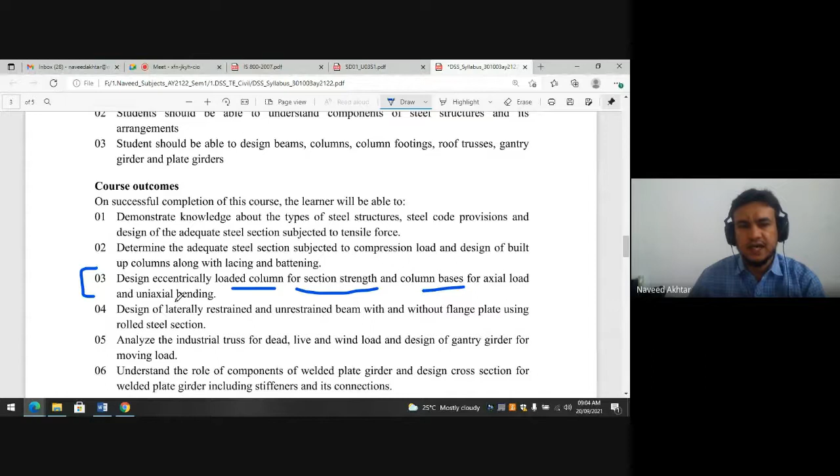So mostly in unit number 3, if you look at the syllabus, the course outcome number 3 is the design of eccentrically loaded column for section strength only, and column base for axial load and uniaxial bending. So this is the course outcome for unit 3. If you come to the content of unit 3, it is nothing but the eccentrically loaded column and column base.

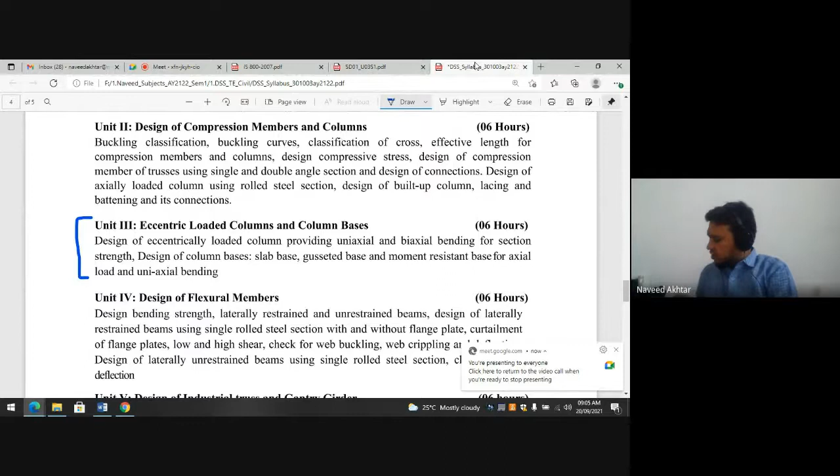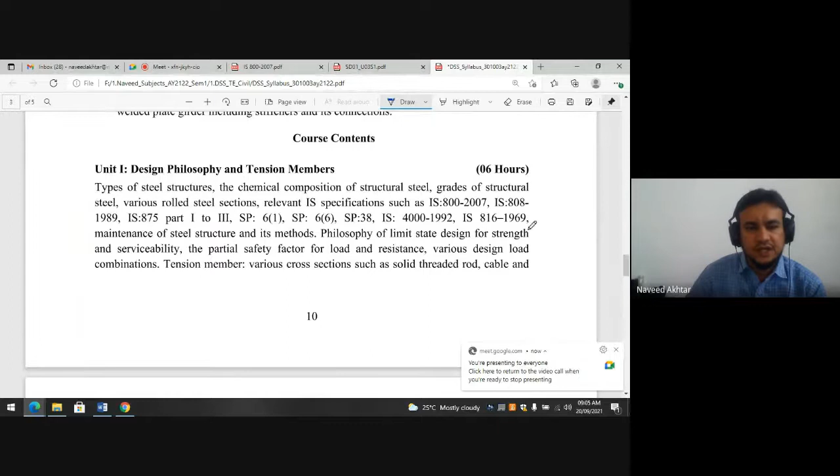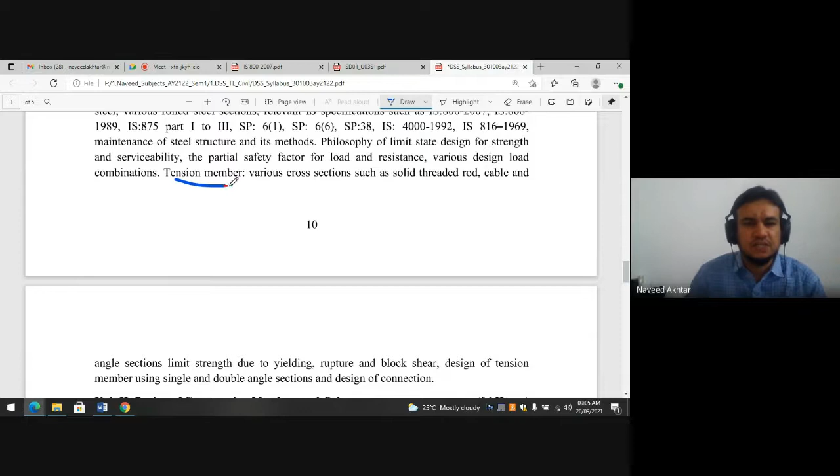Already in unit one we covered the basic parts of design of steel structures, types of steel structures, various codes and design philosophies, forces, factors for material and load, and tension member design. You have seen unit number one and completed it successfully. Additionally, we covered the connection design in unit one.

In unit two, we saw the buckling classification as per IS code: buckling curve, that is class 1 plastic, class 2 compact, class 3 semi-compact, and class 4 slender. Classification of cross section from table number 2, page 18 and 19. We found the effective length from table number 11 of IS 800:2007, and the design of compressive stress.

We covered design of compression member of truss, single angle, double angle, and did examples on that, and also the design of axially loaded column with built-up column sections using lacing system and batten plate system. Steps for that we have seen, and I gave the assignment for the design of batten plate system, and I have shared all design calculations with you on Google Classroom. You can take the notes I have given lecture-wise and complete your assignments, and whatever sheet for lab work I have given you, you should draw.

Now today we will start the design of eccentrically loaded column. We design eccentrically loaded columns providing uniaxial or biaxial bending for section strength only. Only we have to design for section strength here.

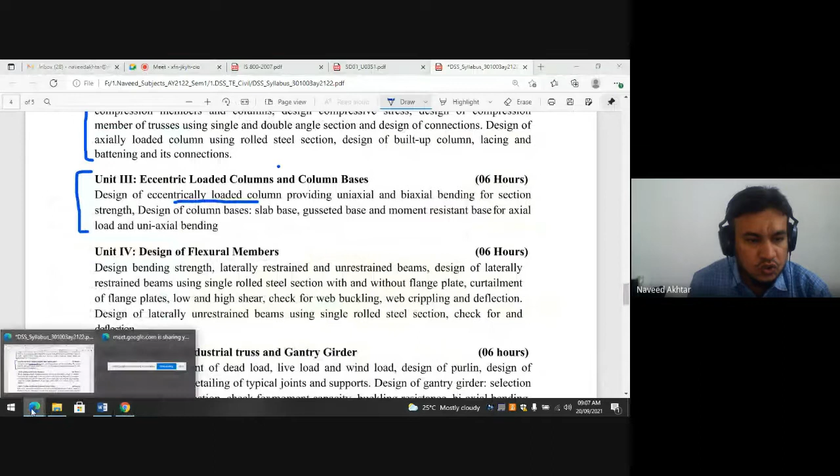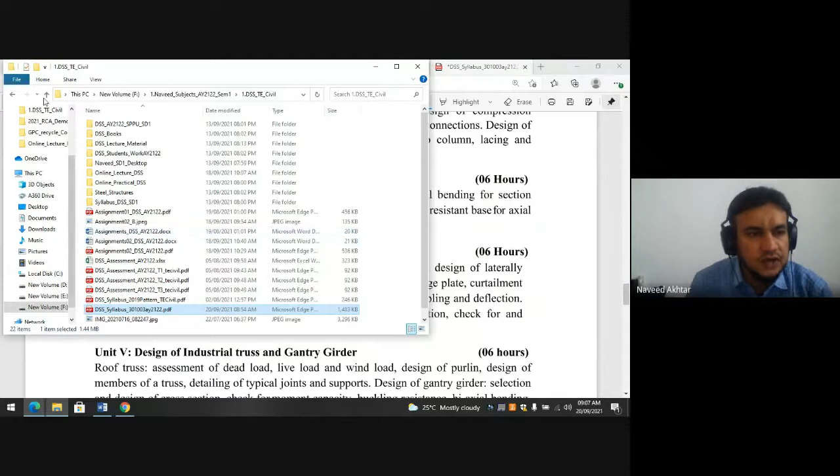You don't need to go for serviceability condition in that case. Only you have to design for the section strength.

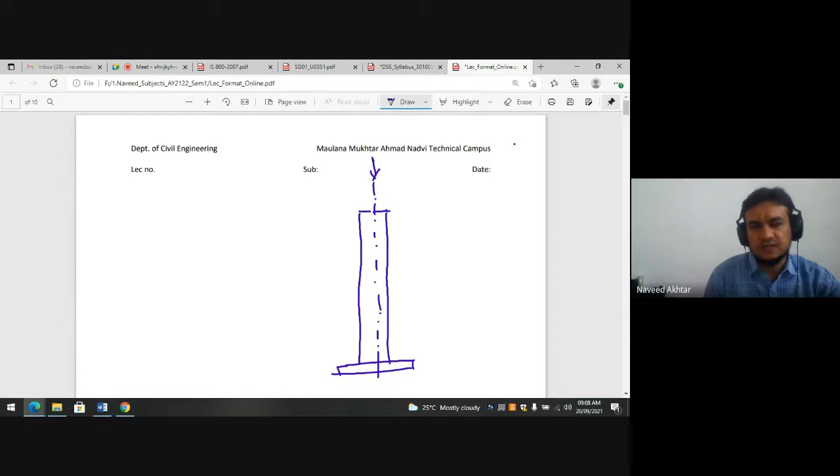So what does eccentrically loaded column mean? Previously we designed the column as the vertical member supporting beams and girders, resting on the pedestal or on the footing or foundation. This column has a line of axis, and the load coming over the line of axis is your factored load. This is called an axially loaded column, when the load is acting at the CG of the section.

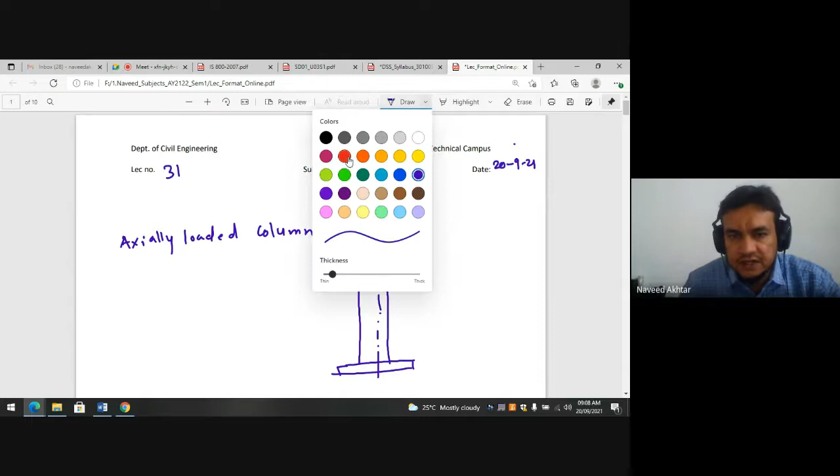If the load is coming other than at that axis, for example in case of a girder resting on a bracket: the bracket carries the load, which is transferred to the column. It is connected to the column with the help of an angle or channel, whatever it may be.

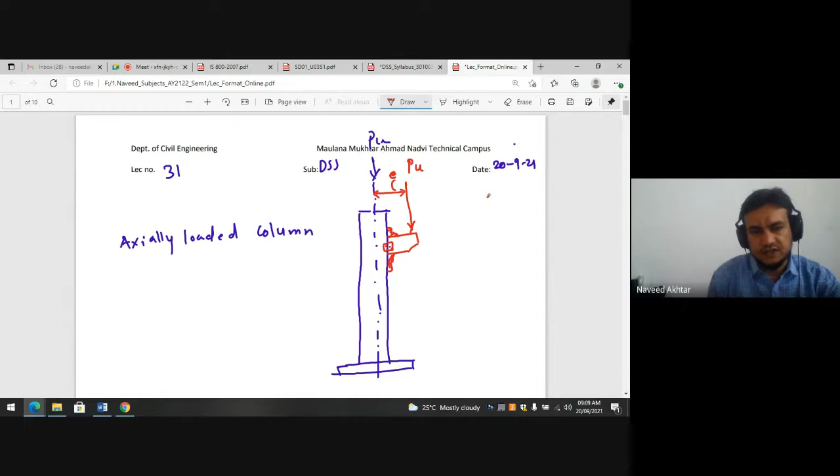If the load is coming here with some eccentricity, that eccentricity creates a moment on the column. So this column, if I mark it in red, is not an axially loaded column anymore — this is an eccentrically loaded column.

In real life, many such cases you will observe. In case of steel structures, most of the time your load is transferred through the bracket, so there is eccentricity on the column. How to design this eccentricity column, we will see the step by step process today. If the column is eccentrically loaded, then we have to design for axial load and moment also, because this eccentricity is causing a moment.

Moment equals P into E, where P is the load and E is the eccentricity, that is, the distance. So load into distance is nothing but moment, measured in kilonewton meter, and load in kilonewtons. If the column is designed for axial load, and due to eccentricity there is moment also, and if it is eccentricity on one side, then it is called uniaxial bending.

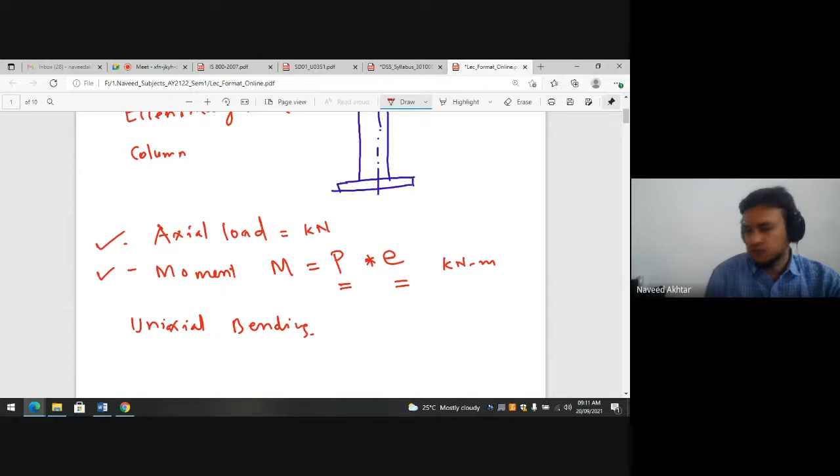Why is it called uniaxial bending? If you see in the plan of the column, this is the major axis, and this is the minor axis. If your load P is somewhere here, this is the eccentricity, and moment is equal to P into E. So at the major axis, if I call it Z axis, then Mz is equal to P into Ez.

But if your load, this is the column, and this is the major axis or minor axis, whatever you can say - this is the major axis, this is the minor axis. If your load P is acting somewhere here, then its eccentricity is Ez, and this eccentricity is Ey.

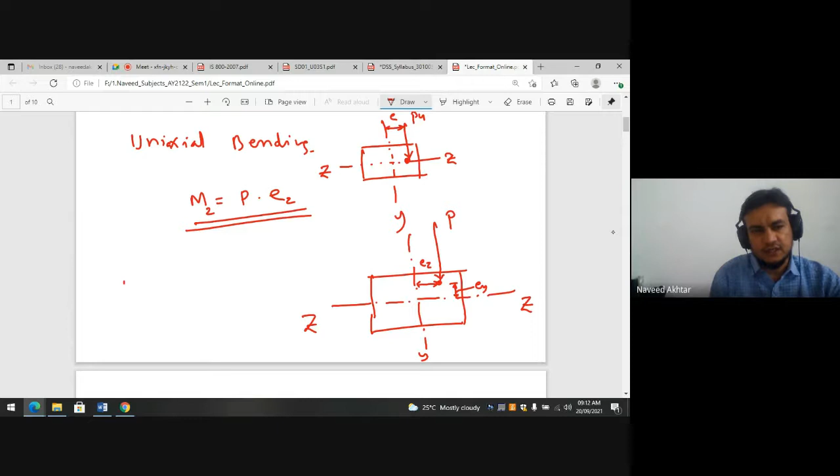If you measure this, then there is biaxial bending. So this is nothing but biaxial bending, and you have to consider both Y as well as Z directions to find out the moment.

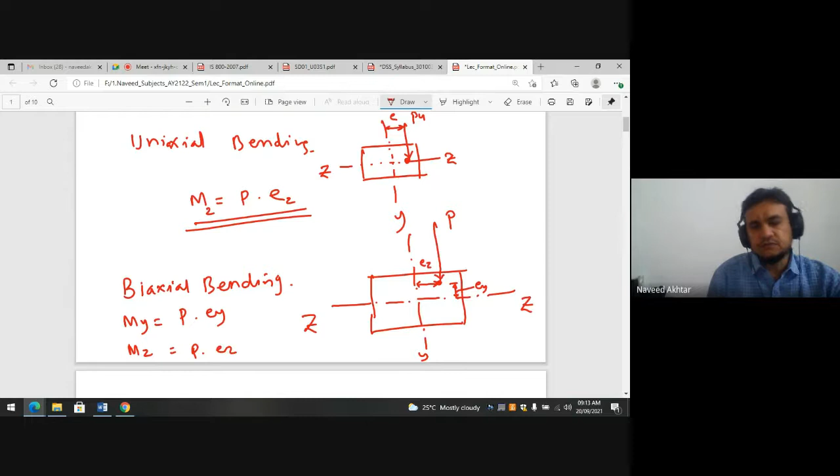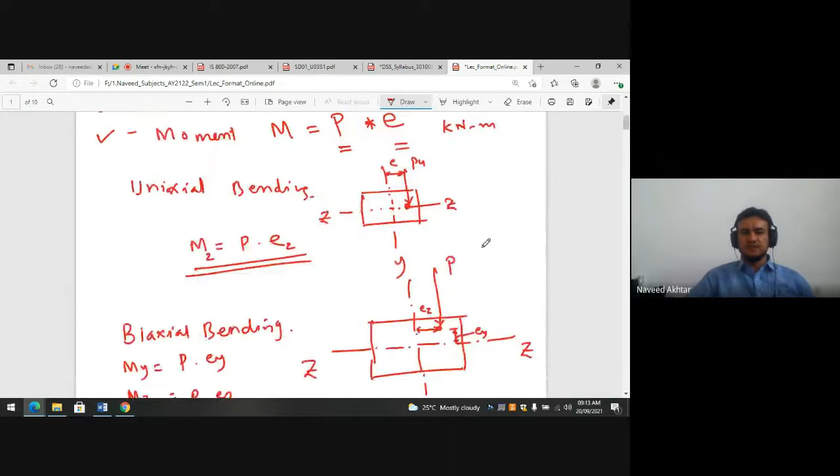So that's why there is biaxial bending. This is what is axially loaded column, and if there is eccentricity, there is bending on the column. It may be in one direction or in two directions. If it is in one direction, it is called uniaxial bending. If it is in two directions, eccentricity on both axes, then the moment will come about both axes, and that is termed biaxial bending.

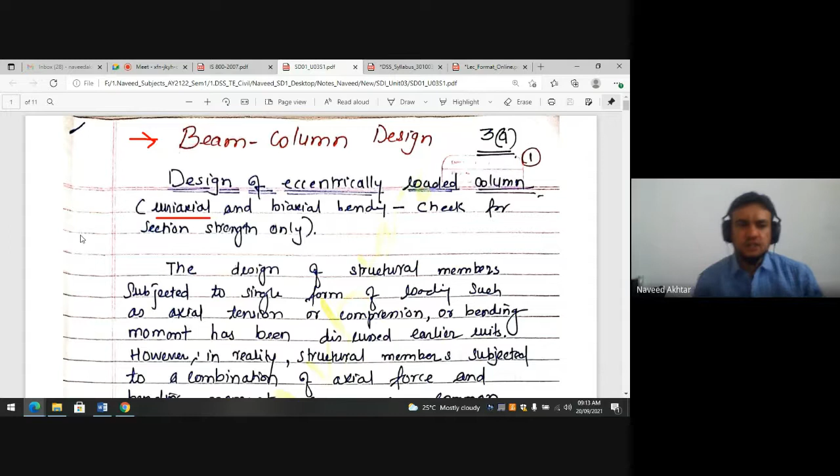Now we will come to the procedure. The design of eccentrically loaded column, uniaxial and biaxial bending, check for section strength only. This is what is given in your syllabus. In your syllabus, uniaxial and biaxial bending is given, but only for section strength. This eccentrically loaded column, when complete, covers all column design.

Then you go for the design of column base, which is unit number 3. So it may be slab base, gusset base, moment resistant base, and for axial load and uniaxial bending you have to do the design. This is our syllabus for unit number 3.

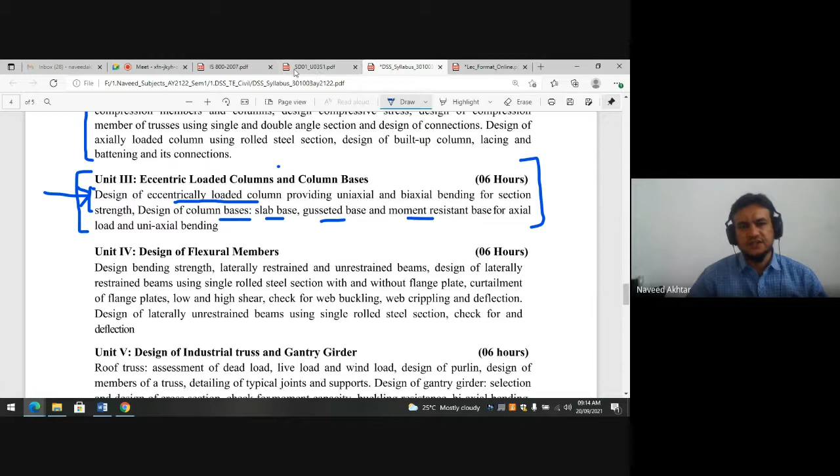So we will start with the eccentrically loaded column. The design of structural members subjected to single form of loading such as axial tension or compression or bending moment has been discussed in earlier units. However, in reality, structural members are subjected to combinations of axial loads. What is the combination of axial load? It means the load is combined with the moment.

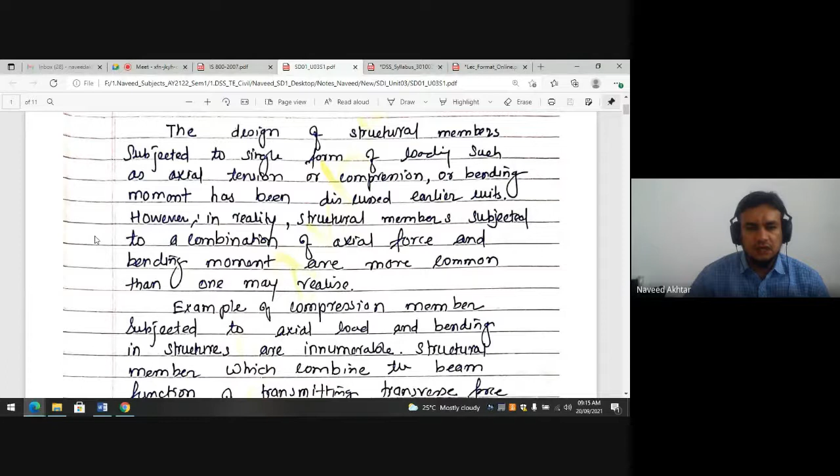Axial load with the moment. In reality, structural members are subjected to the combination of axial force and bending moment more commonly than one may realize - it is actually loaded that way.

Examples of compression members subjected to axial load and bending in structures are innumerable. A structural member which combines the beam function of transmitting transverse force or moment and the compression function of transmitting axial compressive force is known as a beam column. So if there is moment with axial force in the column, that column is called a beam column, and there is bending with the axial force support.

So most beams and columns are subjected to some degree of both bending and axial load - that's why they are called beam columns. The bending moment on a column may be due to any of the following effects. It may be due to eccentricity of the axial force.

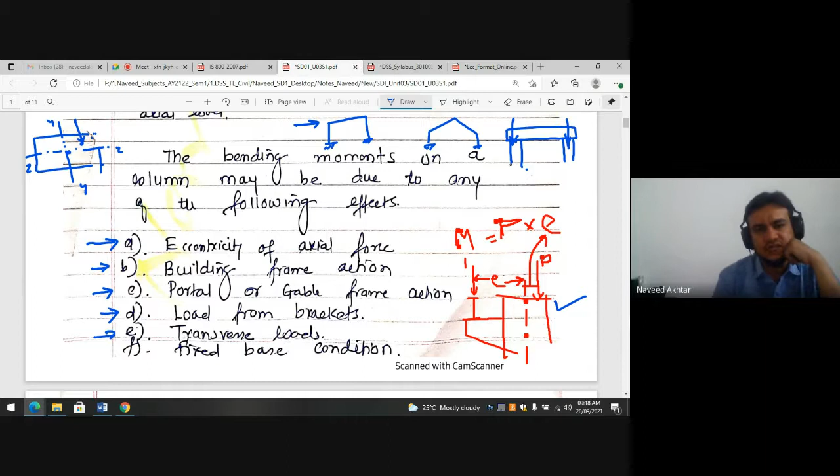Load from bracket, as you see here, this is load from the bracket, there is always necessity for it. And then transverse loading, which means loading from horizontal or inclined surfaces, is called transverse loading.

In fixed base condition also, there is eccentricity on the column, and that's why a moment will appear in the column. You have to design the column for P, that is axial load, and M for the moment.

So these are the conditions where the action on the column may appear, or the column may get axial load combined with moment.

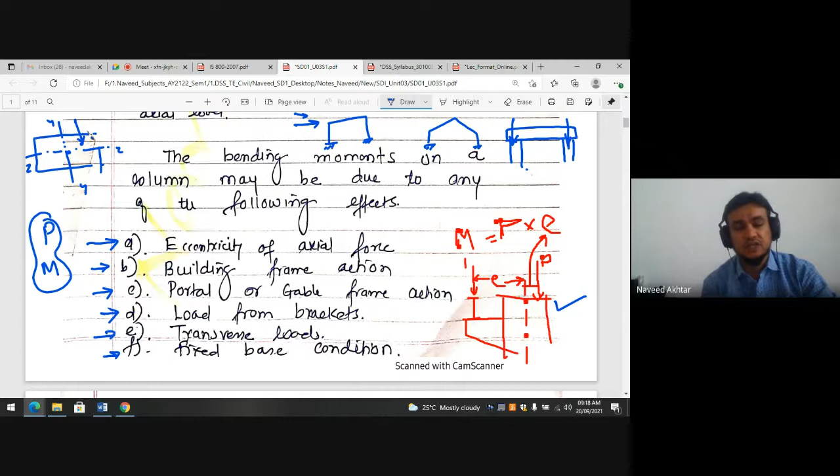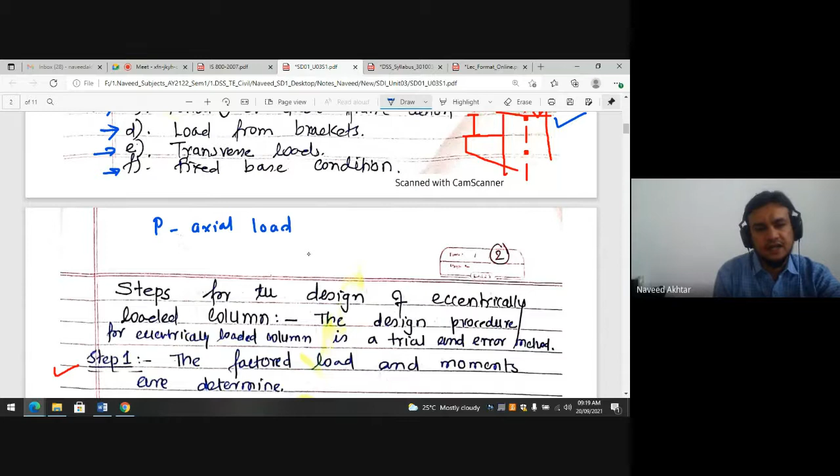Now if this type of column is there, where axial load and moments are both present on the column, how do we design such columns? We will discuss this in the following section, and after that we will go through a design example so you can easily understand how to design an eccentrically loaded column.

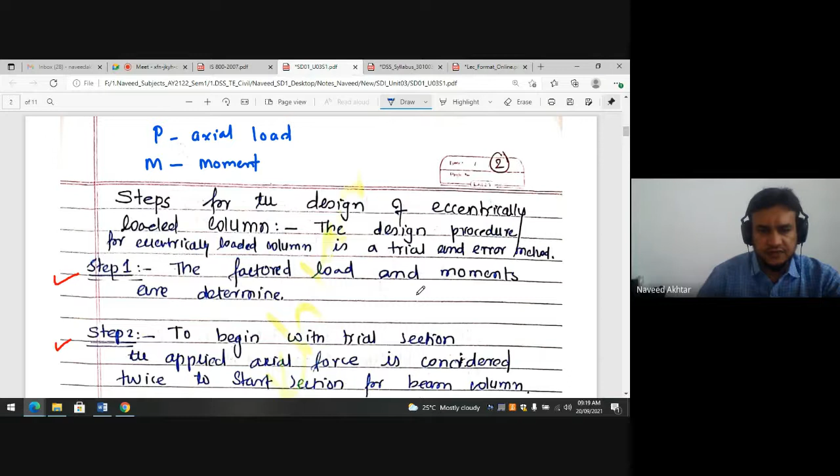So the steps for design of an eccentrically loaded column, or column with axial load and moment: the design procedure for eccentrically loaded column is the trial and error method. You start by considering some trial section.

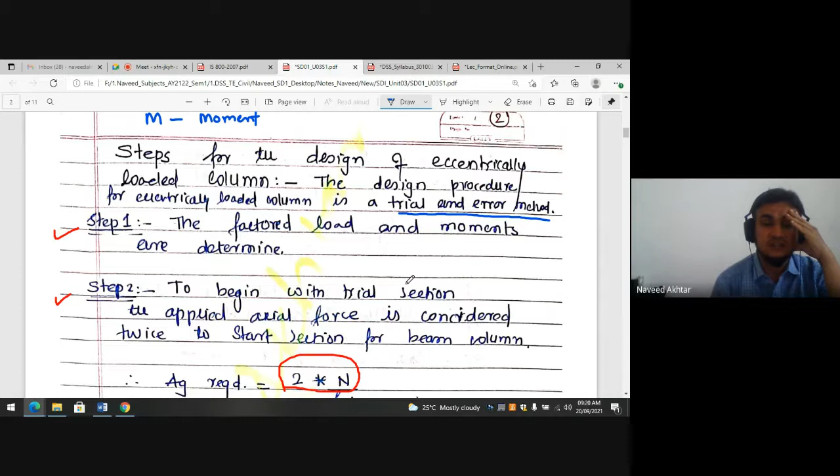If you go for designing it and checking for strength and serviceability conditions, and it behaves well in both, then you can say the trial section you selected is okay. If it fails in serviceability or strength, or both, then you should avoid that section, reselect a new section, and redesign.

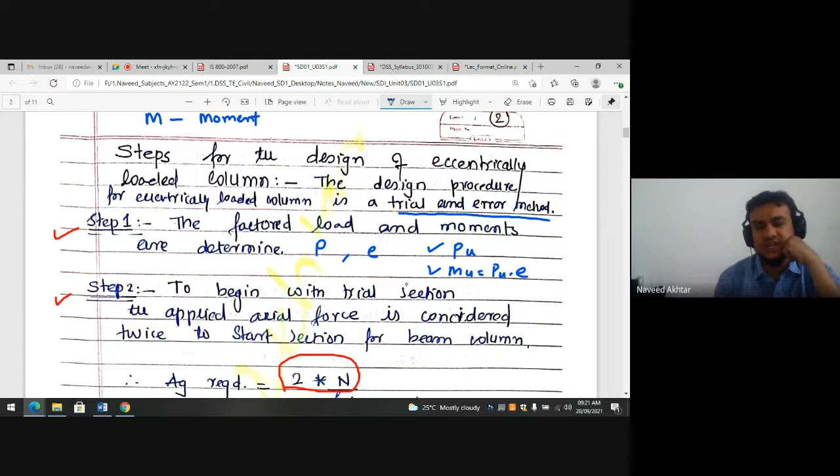So first you have to determine the axial load, that is factored Pu, and moment. With that load you find the moment in one direction if it acts in one direction, or in both directions if it acts in two directions.

So in such a column which has bending and axial force together, called a beam column, when you go for design, you are designing a beam column.

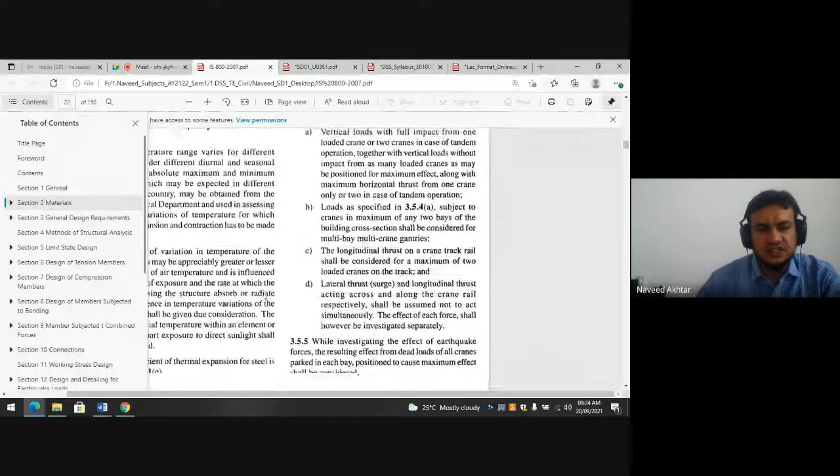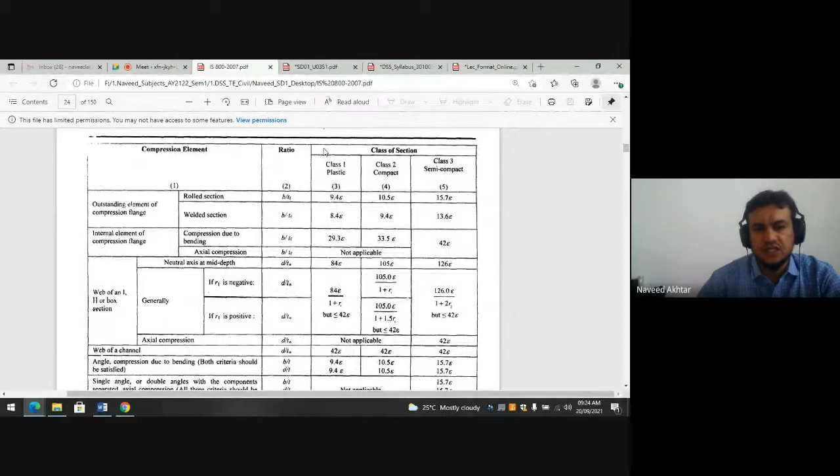So to go for section classification, whatever section you have chosen, go for section classification, and it is on page number 18 of your IS code. If you come to page number 18, you can see page 16, 17, this is it. So here, based on this ratio for the section, as per class 1, class 2 compact, and semi-compact, you have to find out the section class.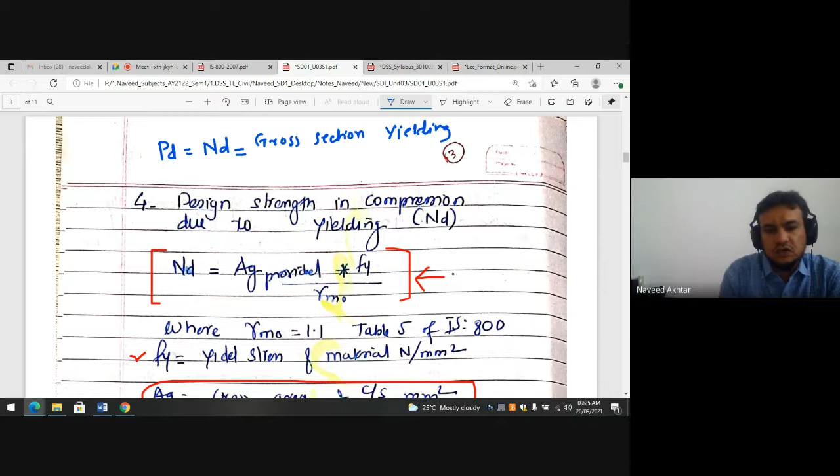Now, design strength in compression due to yielding. Now you have to find out the PD. The PD is here, it is denoted by Nd. Nd is only for the gross section yielding. It is due to gross section yielding.

You know, Ag into Fy upon gamma m0, that is nothing but your PD in this case, and it is denoted by Nd. So this you have to find out due to yielding, where gamma m0 you can find from Table 5 of IS code, on page number 30 I think.

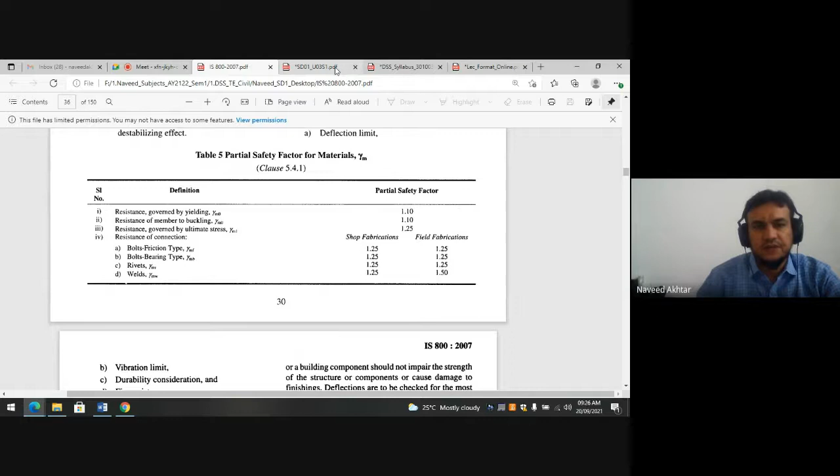Table 5 of IS code gives gamma m, and gamma m0 is nothing but 1.1 for yielding, and for ultimate it is gamma m1.

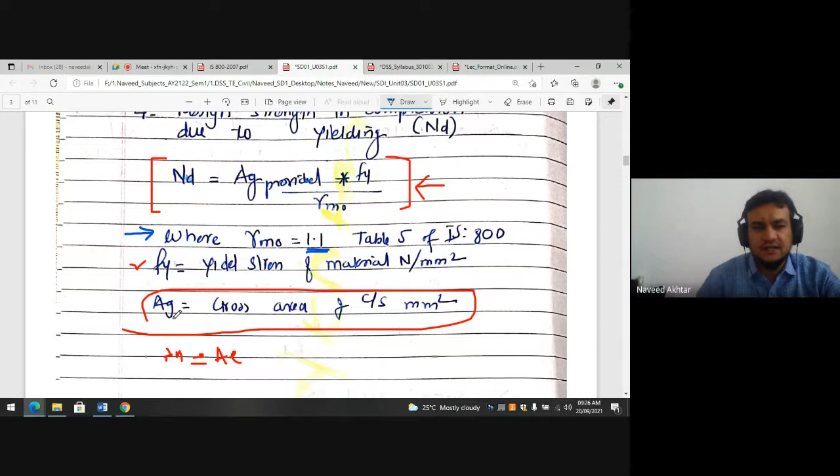So here gamma m0 is 1.1, and gamma m1 is for the limiting value, due to ultimate. Fy is the yield stress of material, Ag is the gross area of cross section whatever you have selected. If it is class 1 plastic or class 2 compact type, then your Ag is equal to Ae. So you have to take Ag here, and then find out Nd equals Ag into Fy upon gamma m0, where gamma m0 equals 1.1.

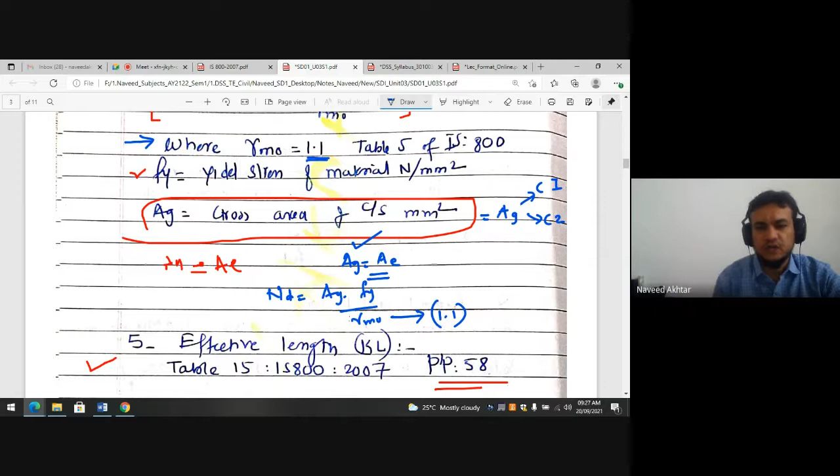Now you have to find out the effective length of the member using Table 15 of IS code at page number 58. Before this, the effective length of column we used for axially loaded columns is from Table 11. Table 11 we are using for axially loaded column.

But here, you have to use Table 15 for eccentrically loaded column. So if you go and check page number 58 of IS code, this is page 58.

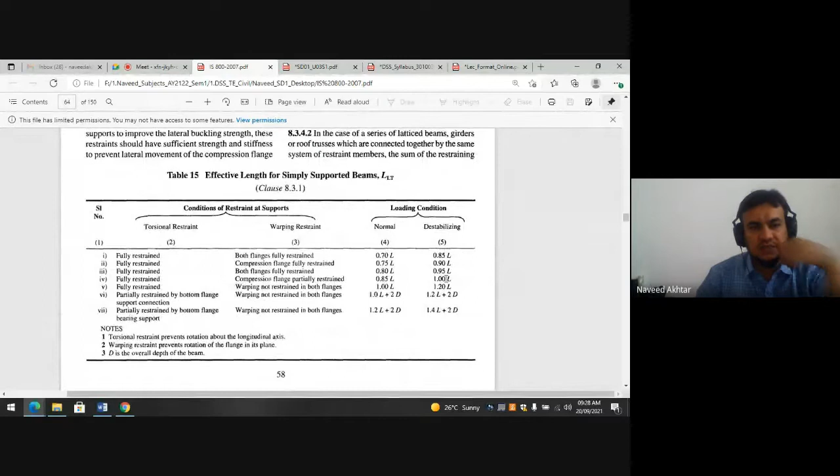So here, this is the effective length of simply supported beam or column, given for beam, but because you are designing beam-column, you take this effective length. So effective length of a simply supported beam is 1.0L, and that is also considered for beam-column design. If it is fully restrained, both flanges fully restrained, then normal condition you take effective length 0.7L, or if destabilizing you take 0.85L.

So from this you will take the effective length of your column. Fully restrained compression flanges, partially restrained, not restrained in both flanges - all these conditions are there, and from this you choose normal condition or destabilizing condition, whatever you are considering, and from that you choose the effective length.

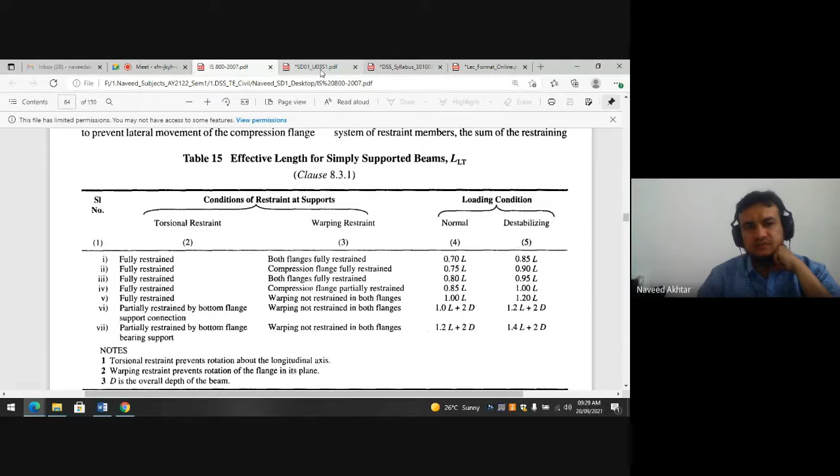So this is step number 5, where you can find out the column effective length from page number, Table number 15.

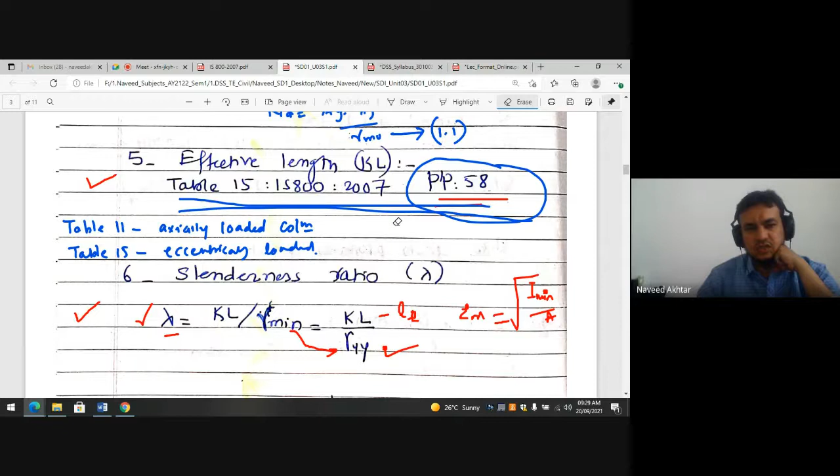Now, you know the LE, you have to find out R minimum. You can directly, from sectional properties of the member, easily find out R minimum. Generally RYY, the minor axis, is always the minimum - always the R minimum is about the minor axis. So if you select R minimum, then you find out lambda, and lambda is nothing but LE upon R minimum.

R minimum, if you don't know, you can calculate as under root of I minimum by A. Because in case of a built-up section, you have to find out the moment of inertia using the parallel axis theorem, and divide by area to get the R.

But in case of rolled steel sections, it is already given in the steel table. These values you can directly take from the sectional properties given in the steel table, and from that you can find out the lambda.

Then step number 7 is to find out the HF by TF value. HF is nothing but, in the IS code, the steel table gives it as H1. HF is the center distance between the top flange and bottom flange line. So if this is your IS section, this center to center distance between the planes is your HF.

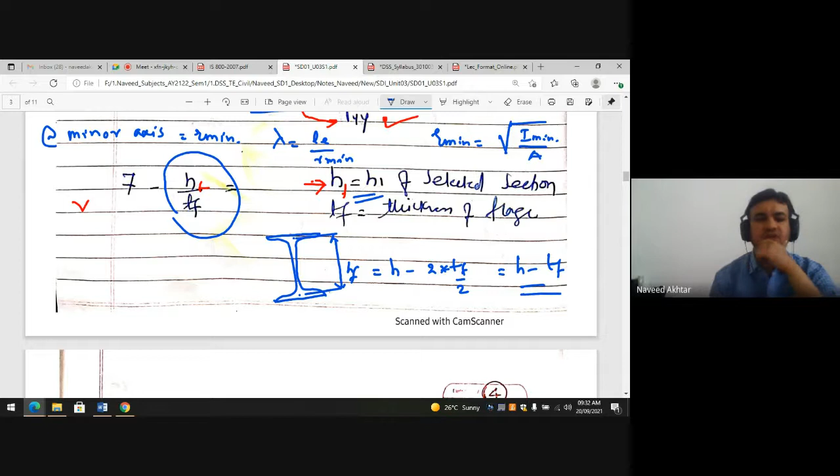So HF is equal to H minus 2 times TF by 2, that is, H minus TF, which is nothing but your HF. So you can find out the HF by TF value, and based on this value, from table number 14...

As per the HF by TF value, you can find out the critical stress FCR. You can find out the critical stress FCRB from page number 57 of the IS code.

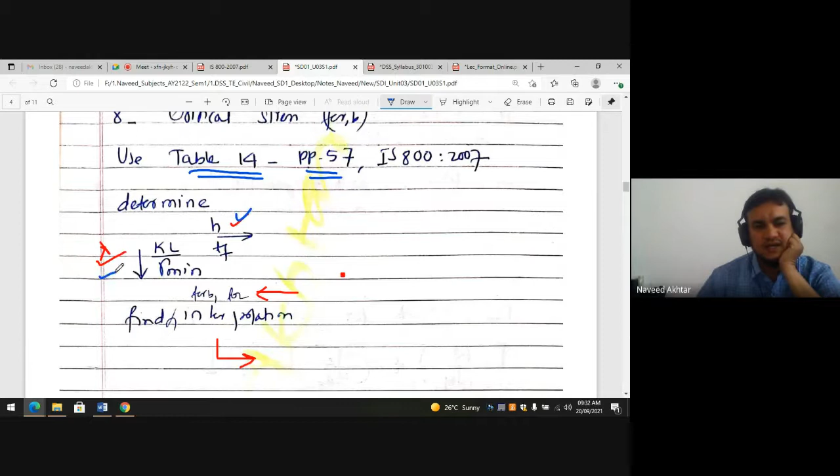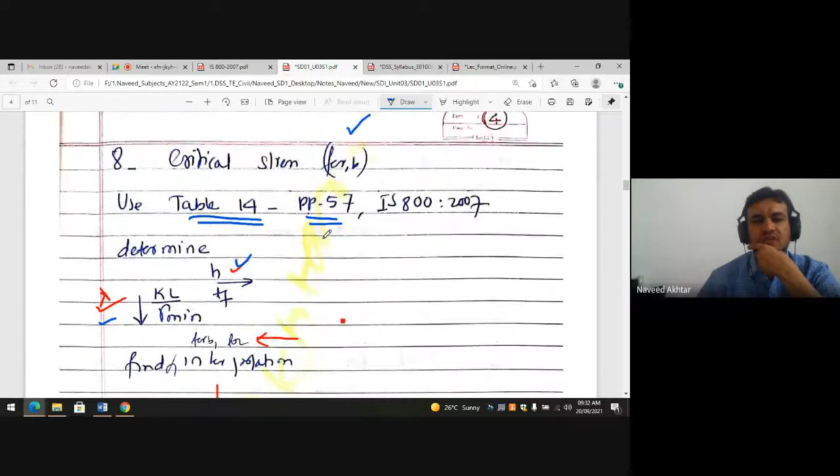So if you know the HF by TF value and the lambda value, you can find out by interpolation the value of FCR. If you see table number 14, it gives the FCRB value based on KL by R min, the lambda value, and critical stress based on HF by TF value.

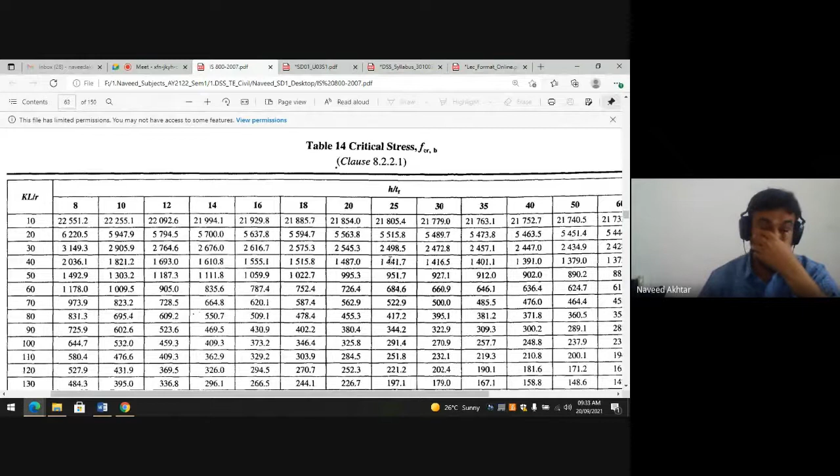This HF by TF value may range from 8 to 100. Based on that, if it is in between 25 and 30, say 28, then from interpolation we can find out the value. It may require one interpolation, or it may require two interpolations, and from this we can find out the FCRB by interpolation.

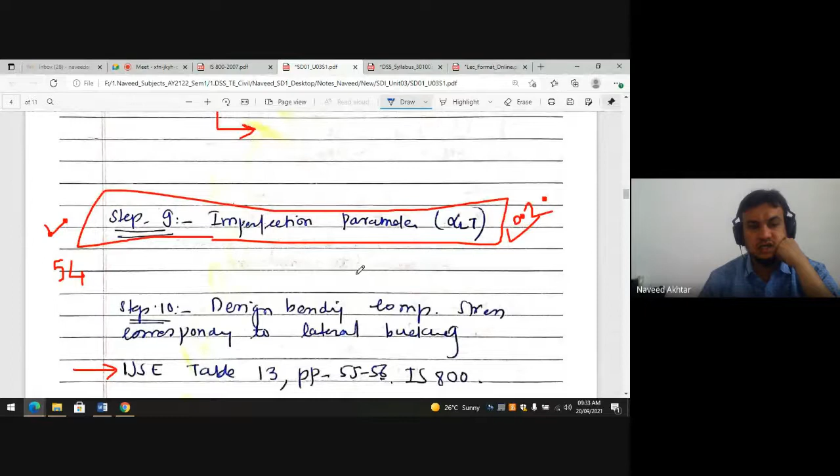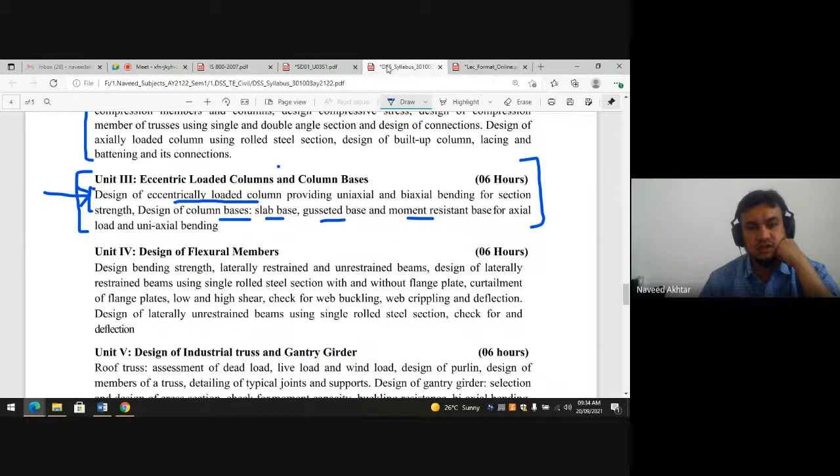Step number 9, you have to find out the alpha LT, the imperfection factor. The imperfection factor you can find out from here, alpha LT. Based on alpha LT, you will find the imperfection factor, maybe 0.21 or 0.49, based on the type of section you are using.

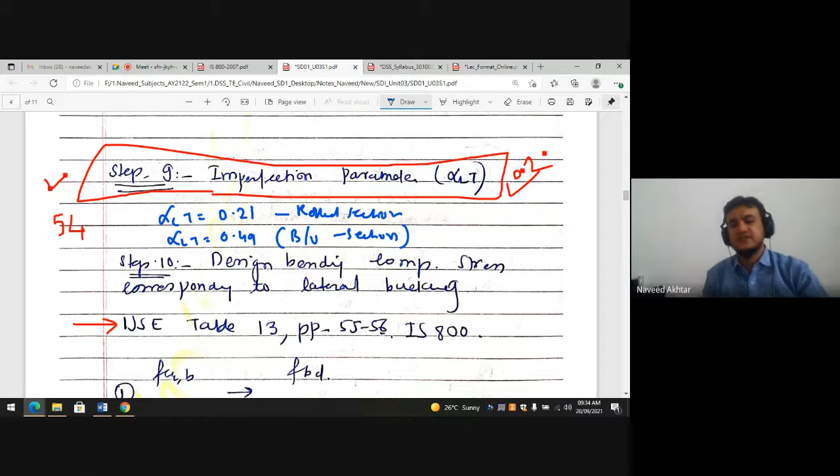Based on the type of section you are using, the alpha LT value may be 0.21 for rolled steel sections, and 0.49 for built-up sections, I think. This value is already given in the steel table, and from that you can find out the alpha.

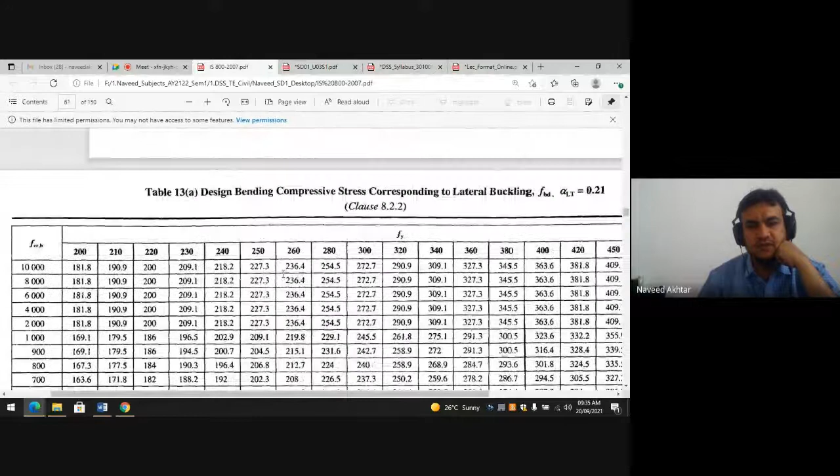Then you have to find the design bending compressive stress FBD, corresponding to lateral buckling. This is given on page number 55 and 56 of IS code. You can see it based on the alpha LT value.

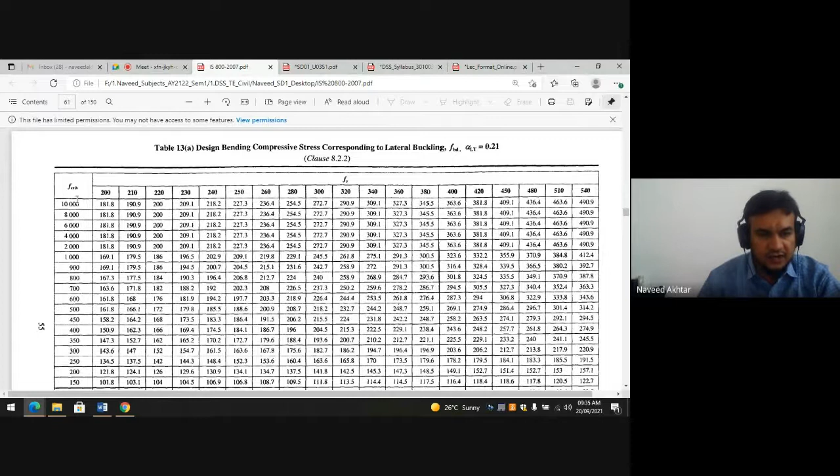This is table 13(a), design bending compressive stress corresponding to lateral buckling for rolled steel sections. So the Fy value, whatever it becomes, is at the top, this is the yield stress Fy of your steel, and the FCRB value is in the extreme left column. Based on this FCRB value and Fy, you can find out the FBD.

This FBD of the section, and once you know the FBD, then MD equals beta B, W, ZP, where ZP is the plastic section modulus, multiplied by FBD. This is nothing but the design bending moment, the design bending strength of the section about the axis you are calculating.

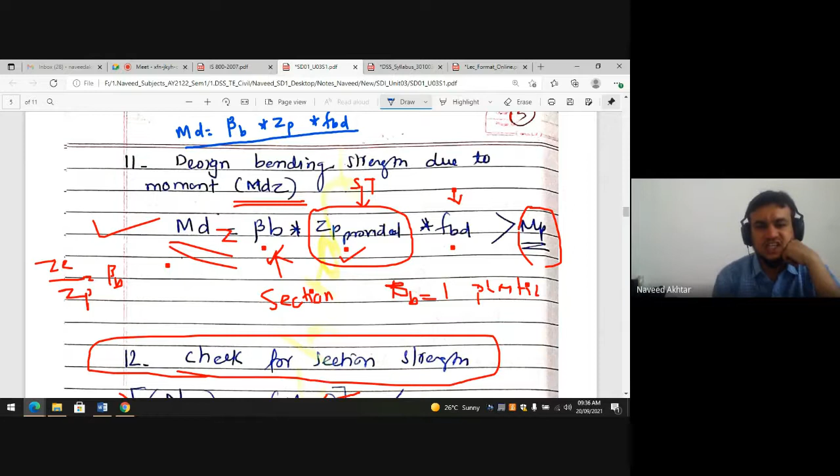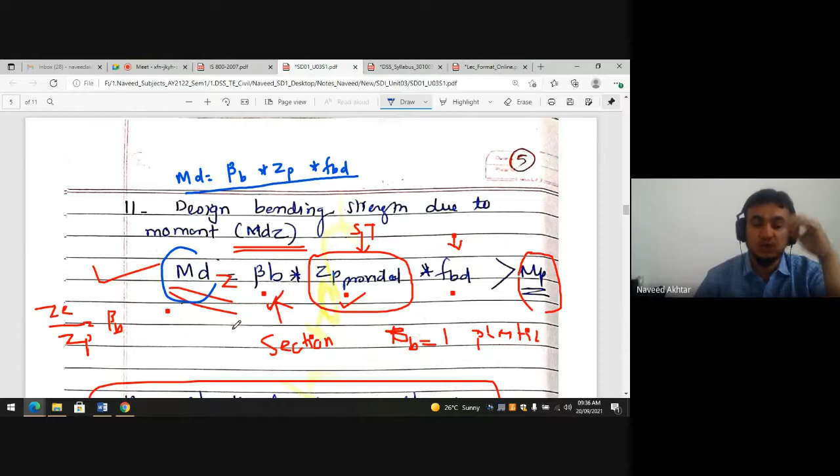If uniaxial bending is there, then this MD is for only one direction. If bending is about two directions, or there is eccentricity in two directions, then you have to find MDZ, that is beta B into ZPZ. Similarly for MDY, you have to find beta B, W, ZPY. So likewise you have to find out the section properties.

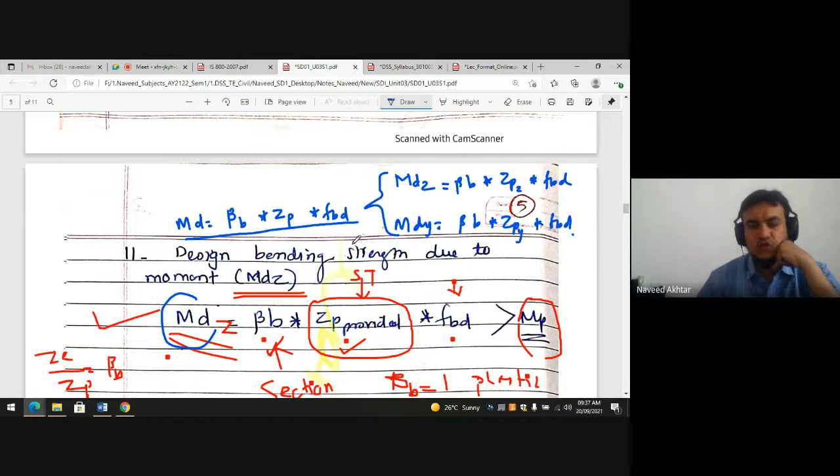If biaxial bending is there, then in both directions you have to calculate the MD. If only one side eccentricity or uniaxial bending is there, you check the section using that formula. But if you have biaxial bending...

For biaxial bending, you have to use this formula: N upon Nd, where N is the actual load given and Nd is the yielding strength due to axial load, that is, AgFy upon gamma m0 which we calculated earlier, plus My upon MDY plus Mz upon MDZ, and that should be less than or equal to 1.

If this value is less than 1, you can say your design is okay, or your selected section is okay.

Okay, so this is about design of eccentrically loaded column. If uniaxial bending, then only this formula you use. This is for uniaxial bending.

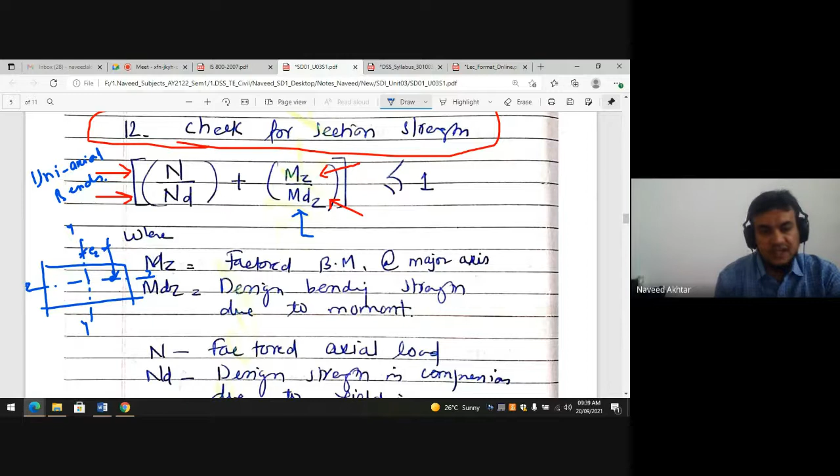I mentioned earlier, uniaxial bending is when this is your column, this is the axis, this is another axis, z, y. Your load is coming here with eccentricity Ez in one direction, so this is uniaxial bending. But if your load is somewhere else, with eccentricity on both sides of the column, that is called biaxial bending.

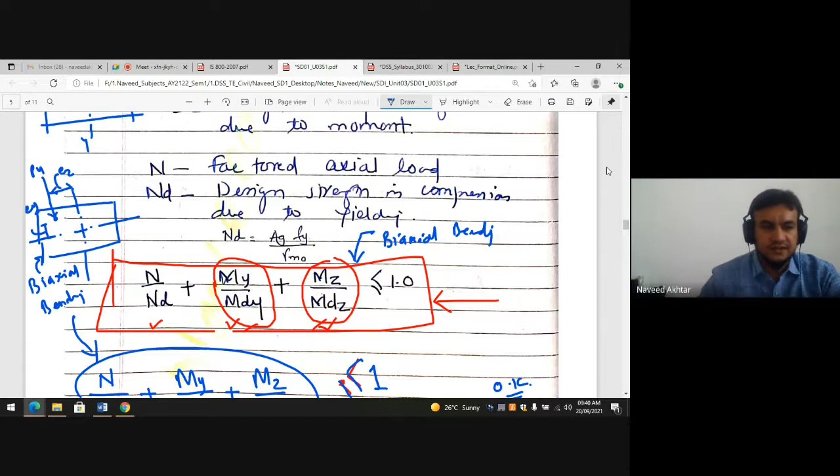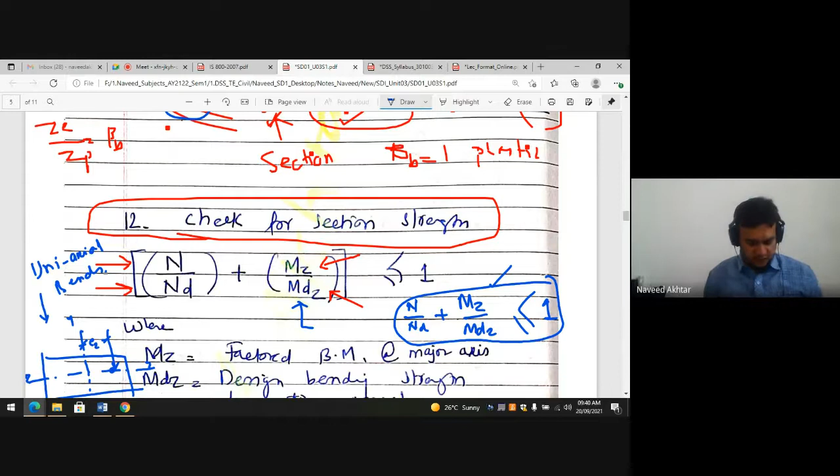So if biaxial bending is there, then you have to use this formula, and if uniaxial bending is there, since there is no eccentricity in both directions, you go for N upon Nd plus Mz upon Mdz. This is the interaction formula, and if this is satisfied, you can say that your selected section is capable of taking that much axial load and bending. This is our design of axially or eccentrically loaded column.

Now we will take one example, and after this example, we will be able to design an eccentrically loaded column. So all students, please open your camera, open your notebook, and write down the type of question. Write down the question, and then we will start.

Check the adequacy of the ISHB 450 at 87.2 kg per meter, to carry a factored axial compression of 750 kilonewton at an eccentricity of 270 mm about its major axis. The effective length of column is 3 meter. Consider only section strength.

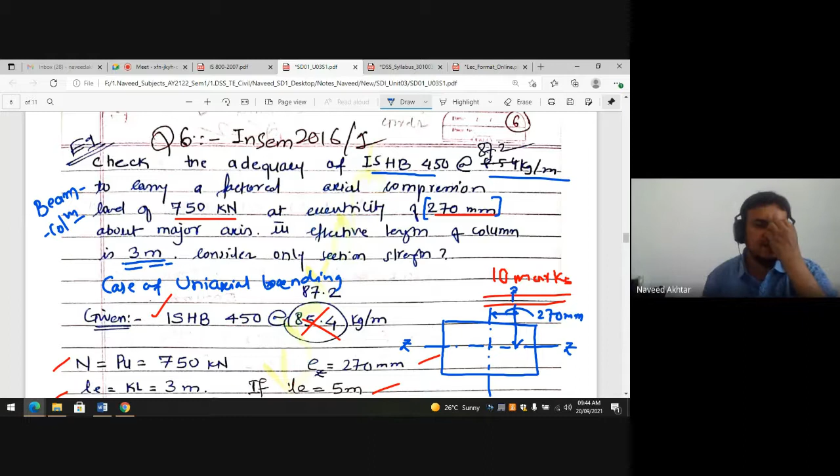This is the load, your ZZ axis, major axis. So this is the case of axial load and uniaxial bending, because only one axis has eccentricity. Therefore, that is the case.

So you have to write down whatever is given: your load N, that is P, factored load is 750 kN. Eccentricity Ez is given as 270 mm. Effective length is given as 3 meter. Then determine the factored moment.

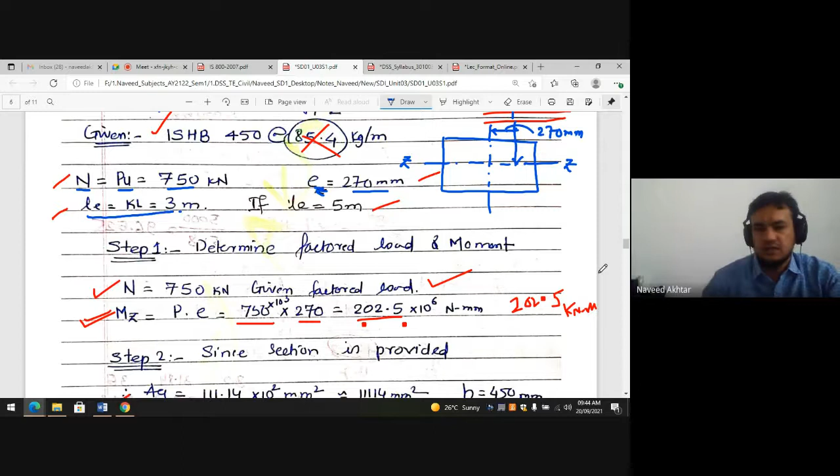Now you know the axial load is 750 kN. How to find the moment? Moment for uniaxial bending, Mz is equal to P times Ez. P is 750 into 270 mm, so it comes to 202.5 into 10 to power 6 Newton mm, or 202.5 kilonewton meter.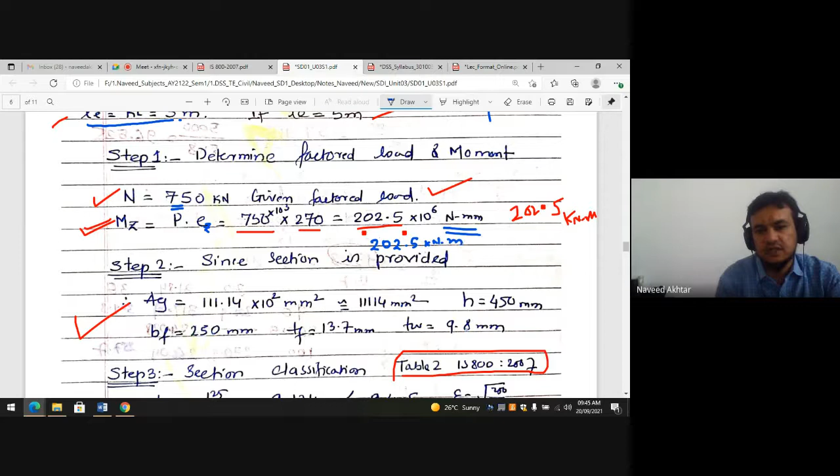So generally, if the section is given, you can select the properties of the section from the steel table. So directly you can go to the steel table and take the properties of the section from there.

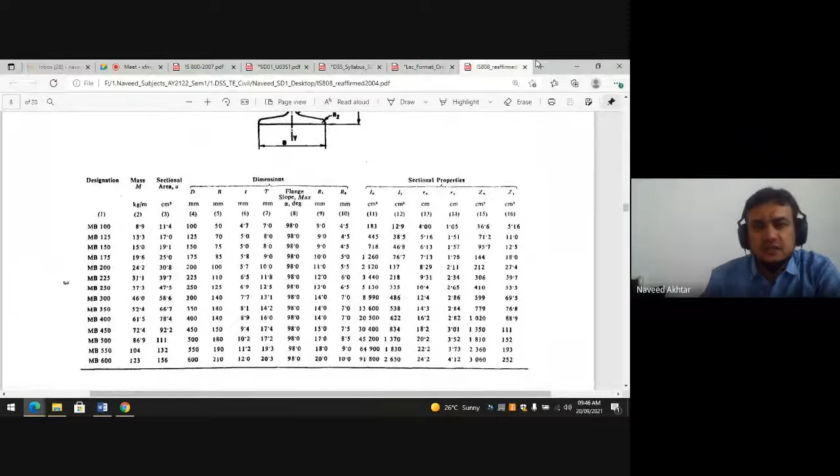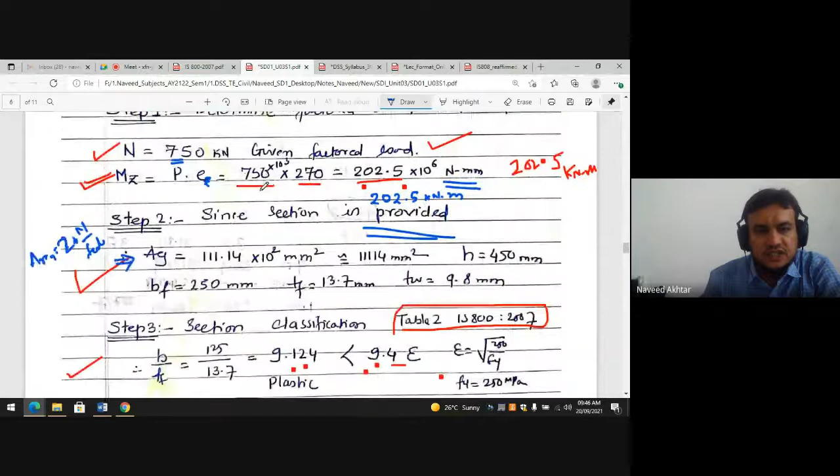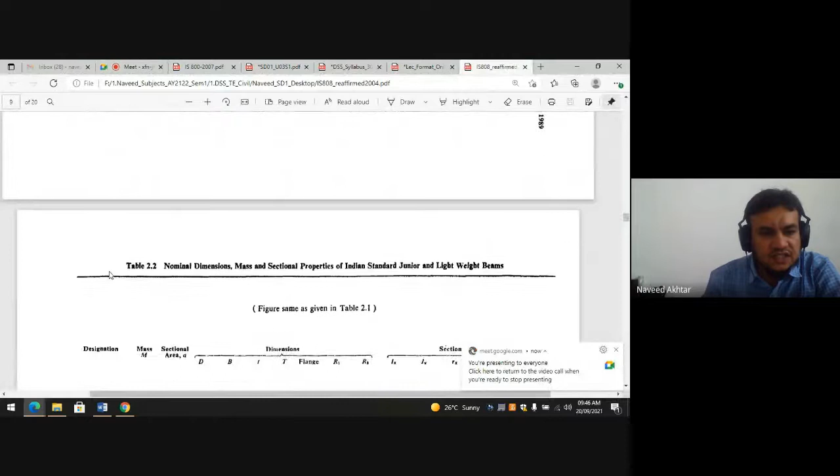So which section is given in our example? It is ISHB 450, 87.2 kg per meter. I will check the ISHB 450 in the steel table. Here, ISHB 450 about 87.2 kg, last but one from the bottom, you can see the load. The area is 111 centimeter square, so I will write down area as 111.14 into 10 raised to power 2, that is 11114 mm square.

Total height of section, depth of section is 450 mm, width of section 250, thickness of flange 13.7 — you can see here 13.7 — and 9.8 is the thickness of web, you can see here.

Here you can see this thickness of bed, thickness of flange 13.7, and thickness of web 9.8. Now in the section classification, the section classification B by TF ratio is 9.124, which is less than 9.4 epsilon. It means that our section flange is plastic.

Then we will go for check for the web. Web is also plastic, class 1 plastic. This is also class 1 plastic. So what happens? The section is plastic.

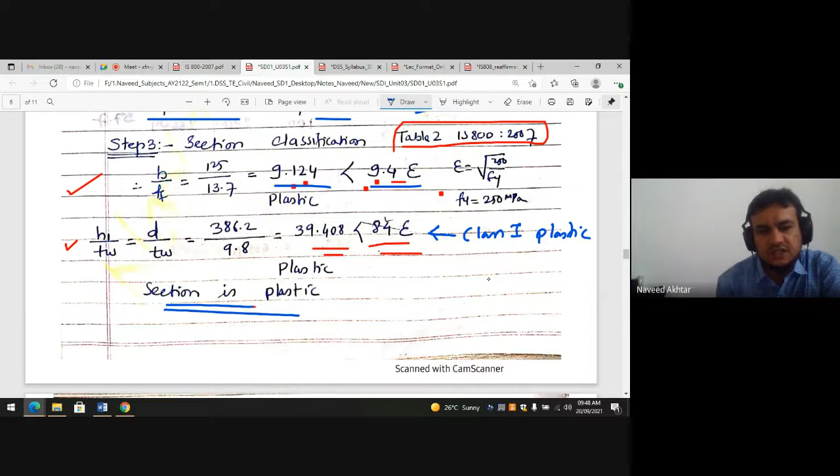Similarly, step number 4, you have to find out the ND, that is design strength of compression due to yielding. Area provided, we know because already we have selected, the section is given. So from this area into Fy divided by gamma m0, it is coming to 2525.9 into 10 raised to 3 Newton.

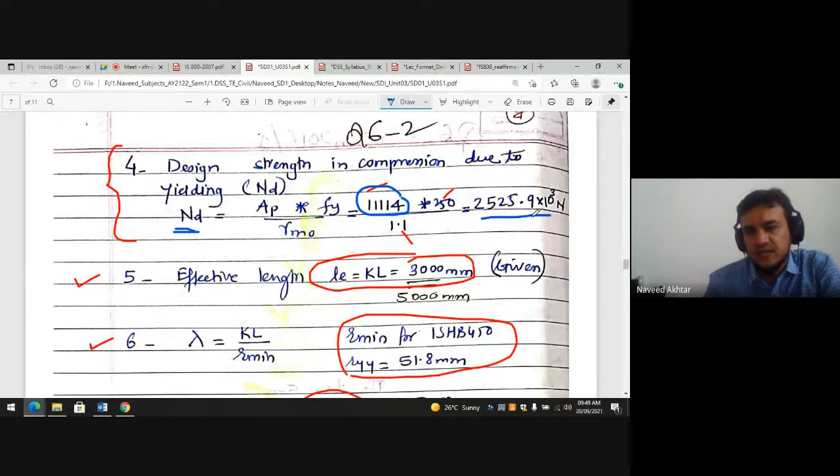Then effective length, it is already given 3 meter. 3 meter means the LE is already given 3 meter. 3 meter means 3000 mm. Okay, I will write down this is LE.

R minimum you can find out from the steel table. So from steel table you can see here, this is the R minimum, this is RYY. This RYY is given in centimeter, you see in centimeter, so converting in mm, this value to 51.8.

If you see here, I will write down, you can see 51.8 mm. 5.18 that is centimeter, you convert in mm. Then you can find out lambda, slenderness ratio, LE upon R. So LE is 3000 mm, R is 51.8, you will get the lambda.

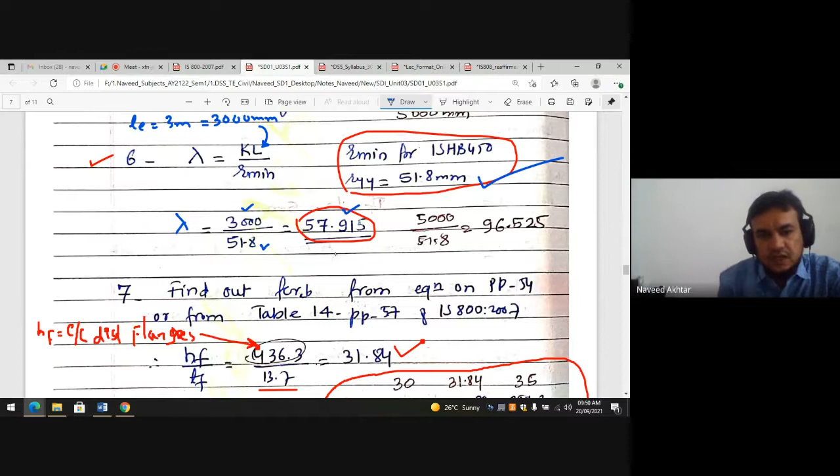Now from this lambda and HF by TF value, we know, you have to find out by interpolation. By interpolation you have to find out FCRB. What you will find out? FCRB. So for FCRB, use table 14 of IS 800, 2007.

Okay, so if I go to IS 800 2007, it's 13A, it's 13B, we need to find the critical stress FCRB. For HF by TF value, this is the HF by TF value, and here the lambda. Lambda is 57, which is in between 50 and 60, and HF by TF value. So here HF by TF value is coming.

HF by TF value is coming 31.84. How is it coming? The HF is 436.3, thickness of flange is 13.7. If you divide by this, your value comes to 31.84. But here FCRB value in the table, you can see, is given for 20, 30 and 35. It is not given for 31.84.

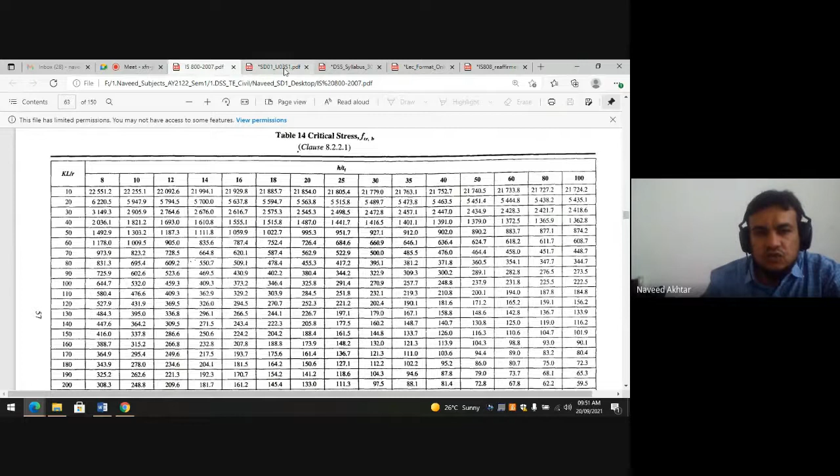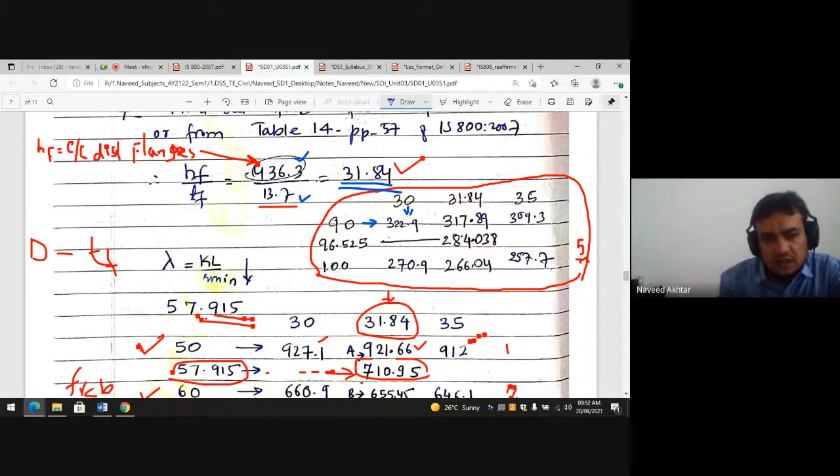So what you have to do, you have to write down each value. For 30 you have to write down the value as per the lambda, where is your lambda. For 30 you have to write down, for 35 you have to write down, and for 50 value is given, for 60 value is given, but for 57.915 the lambda value is not given.

For this it is not given. What you have to do? You have to write down the 30 and 35 value. You take the interpolation, you find this value first. Okay, then by interpolation you can find this value second, and by interpolating these two values you can find out the final FCR. This is the final FCRB value.

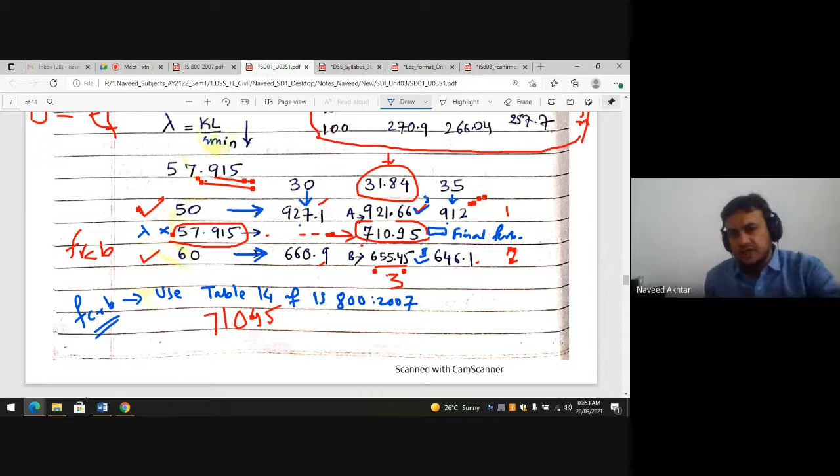So how to do interpolation? We'll solve the example tomorrow. You have to also solve with me and you can understand how to find out.

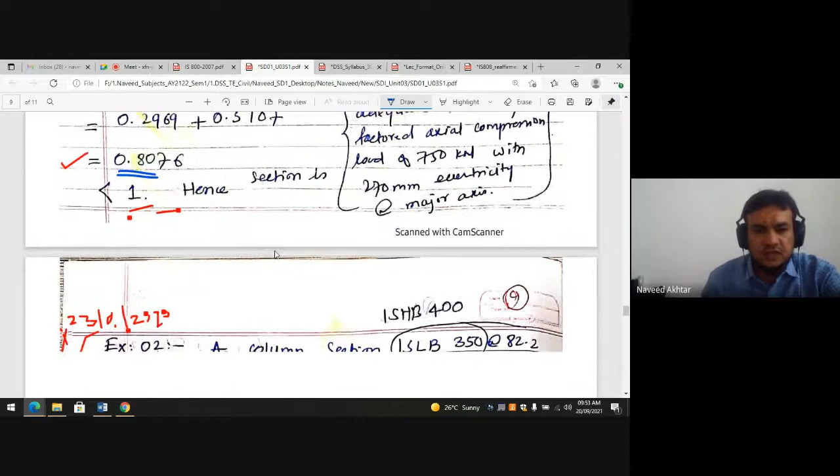And then based on alpha-LT, you will find out FBD and beta B. If section is plastic, beta B is equal to 1, since the section here is plastic. Write down this value and then Mdz from the interaction equation you can find out, this is less than 1, and for choosing a section. So likewise, you will find out the section's strength, and if your section satisfies the interaction limit, that is less than 1.